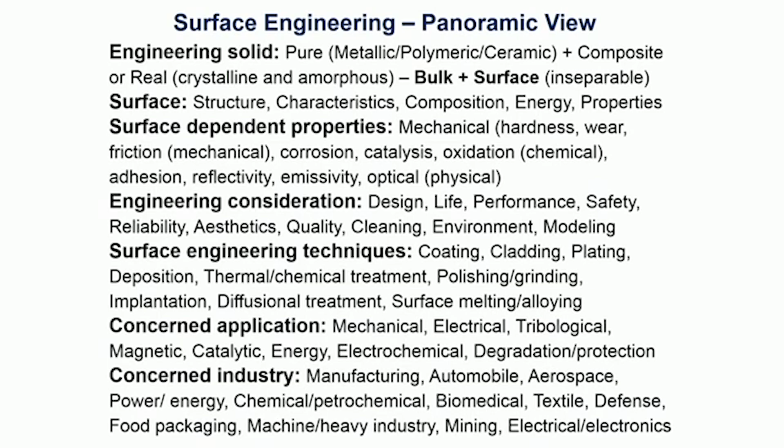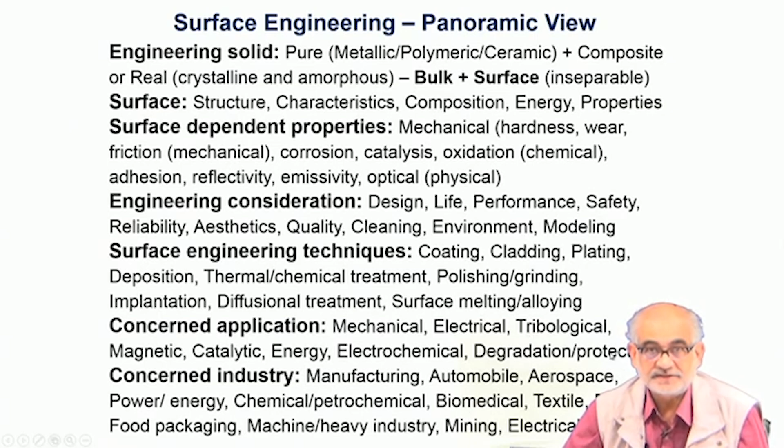It can be just from very intricate to mundane routine manufacturing processes, automobile industry, aerospace, power or energy production, chemical or petrochemical, biomedical, textile, mining industry, heavy machinery, food packaging, electrical and electronics, almost all kinds of applications. Wherever we are dealing with hardware, which is essentially a solid component, we certainly will have surfaces, and these surfaces are very important to make sure that the component actually performs to our desired expectation.

So talking about surface dependent properties, essentially we are talking about engineering properties. For example, when we talk of strength, when we actually perform a tensile deformation or a compression deformation or torsional deformation, we are talking about the strength of the bulk.

But when we try to scratch a solid and see that whatever device we are using for scratching is unable to make a scratch, then we conclude that the surface is very hard and we cannot make any scratch or indentation.

So we then derive a property called hardness, which essentially means the component is very much resistant to surface deformation. So I have taken the liberty of picking up three classes of properties, namely physical, mechanical and chemical, and listed certain properties which are essentially dependent only on surface chemistry and surface microstructure. For example, roughness, the asperities on the surface, color and reflection, emission or emissivity, wettability or adsorption characteristics, adhesion or cohesion - all these properties are essentially surface dependent properties and physical in nature.

When you actually apply mechanical deformation or mechanical activation, then you are concerned with certain responses. These responses could be hardness or friction or wear or fatigue and fracture, and so on and so forth. I must also qualify that fracture and fatigue are not entirely surface dependent properties, but the failure from these two classes essentially initiates at the surface.

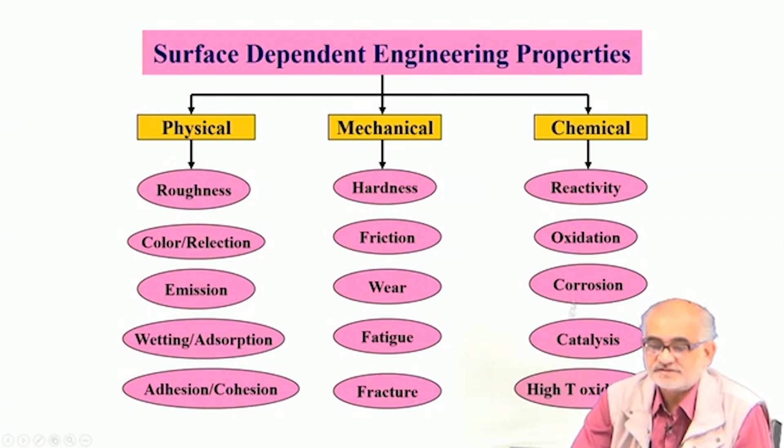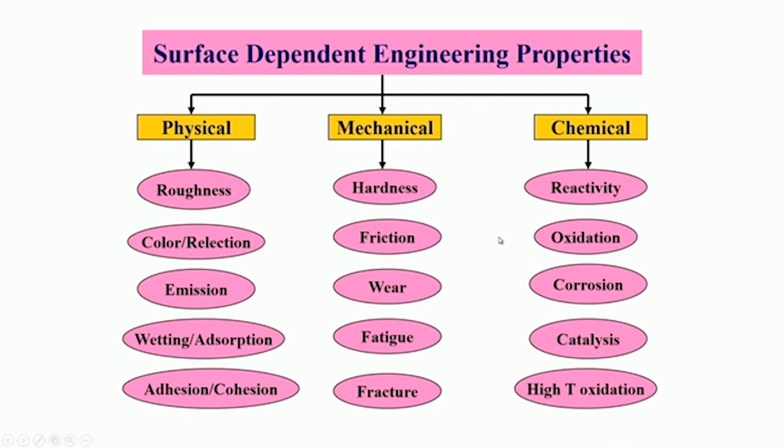So in order to improve upon the fatigue or fracture characteristics, one does take care of the surfaces. Similarly, chemical properties, namely reactivity, oxidation, corrosion, catalysis, high temperature oxidation - all these properties are essentially surface dependent properties. So for the time being, let's focus on the mechanical properties.

So essentially the definition or the scope here is that we are applying mechanical forces onto a solid component, and under that mechanical activation or stimulation, how does the component respond? That's the mechanical response or mechanical properties.

Obviously, the first and foremost would be the discussion on hardness. Whenever we talk of the mechanical strength of a material, even though it is a surface dependent property, we would first like to refer to hardness. So it's nothing but resistance to indentation or surface deformation.

So it basically expresses how resistant the solid is to such attempts to deform, and these deformations are usually through compressive forces. How does the material resist any attempt to deform under such compressive loading? The hardness, if it can actually be ascertained by whatever changes the activation makes onto the surface, by macroscopic observation.

We call it macroscopic hardness. So typically the so-called Brinell hardness tester would be one such device, or the rebound hardness by Poldi and so on. Essentially they test the intermolecular bond strength of the molecules or atoms at the surfaces. But then we must realize that no matter what kind of load we apply, we can always have certain derived components which could be tensile in nature or shear in nature and so on.

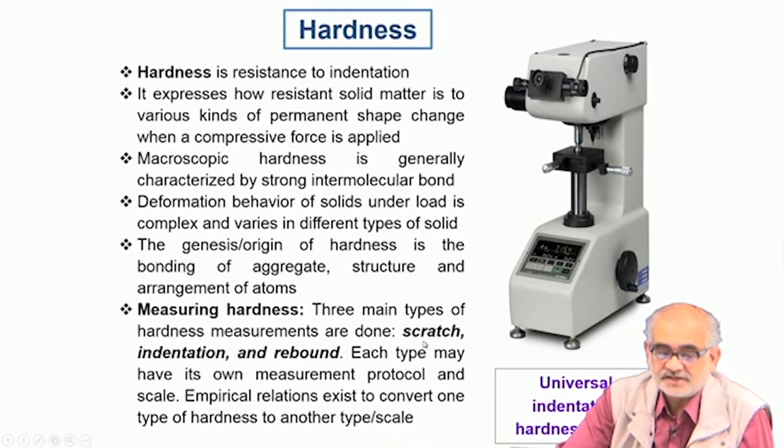Samples could be different. They may not be of very flat and uniform geometry - irregular, circular, completely brittle or powder type materials, like a stone or mineral. On the other hand, you can also have very nice diamond coated surfaces. So various solids present themselves in various forms, and we should have a recipe for measuring hardness for all such solid components under different conditions.

If there is no friction, we tend to believe friction works against the interest of humankind. But if there is no friction, we cannot walk, an automobile cannot stop, or an aircraft cannot land after flight. So friction is essentially a resistive force between two surfaces in relative motion - two solid surfaces, two fluid layers, or essentially any two entities which are sliding past each other.

When we use friction, for example when we rub wood or stone against each other, we convert mechanical energy to thermal energy, and that can actually even create a spark, if not a fire. So friction also allows conversion of energy from one form to another.

In terms of friction, there are four varieties commonly encountered. We can have dry friction, when we don't have any lubricant, and this kind of dry friction can lead to very substantial material loss or wear. We can have fluid friction, which can happen between two highly viscous fluid layers in relative motion. We can have lubricated friction, where we may have solid surfaces separated by a thin layer of lubricant, a very common experience with a ball bearing assembly or various other rotating parts. We can also talk about internal friction.

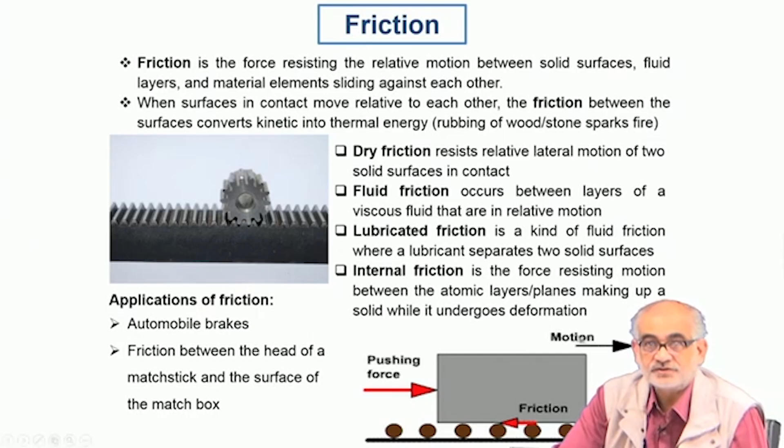Unless we apply sufficient load, convert it into stress, convert it into shear stress on a particular section or plane, enough for a dislocation to move - unless we cross that threshold, the so-called critical resolved shear stress - there will be no motion of dislocation, and we would say the internal friction is so high that we are unable to deform.

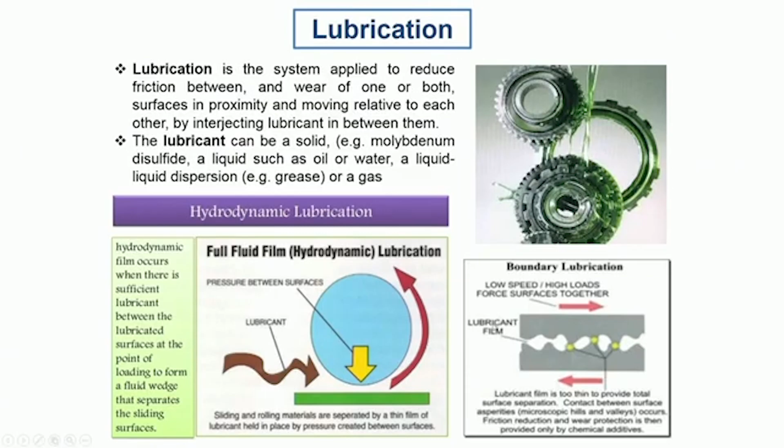So when two solids rub against each other, they are likely to cause certain reaction forces and eventually lead to attenuation of applied energy, and you would like to reduce that. How do you reduce it? You apply lubricants. Lubrication essentially is a system in which you try to reduce the friction and wear, or both.

This is done by applying certain extraneous agents which can be solid, for example molybdenum disulfide, can be liquid like oil or water or some other liquid, or it could be a liquid-liquid dispersion - say, two immiscible liquids together, which when under force allow easy sliding between them. You can even use certain gas or vapor for the purpose of lubrication.

The whole purpose of lubrication is to reduce the friction and also to make the deformation process or mechanical motion easier.

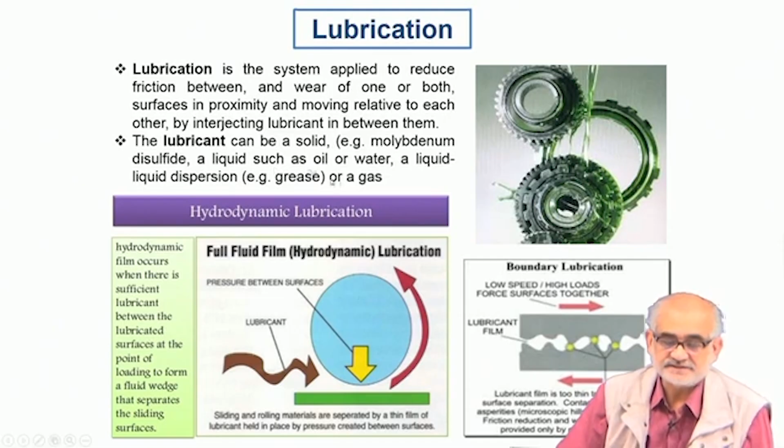Another very commonplace mode of deformation and degradation under mechanical activation is wear or abrasion. Here again we are talking about relative motion between two surfaces, and when we have such relative motion, we expect a certain amount of resistance to sliding, primarily because all solid surfaces which are synthetically produced or manufactured by artificial means will carry certain asperities or roughnesses.

When we have two surfaces with similar or different degrees of surface roughness, the tips of these asperities are bound to interact with each other and resist the relative motion. In most cases, when surfaces are dissimilar in mechanical properties or hardness, we can identify which one is harder, and the harder surface will cause more damage to the softer one.

Even if two surfaces have similar mechanical properties and surface contour, because of the application of forces, a derived component could be compressive in nature. Under such derived compressive loading, there could be momentary welding of the tips of asperities, and subsequent fracture of such cold welded bonds. In the process, a portion of material is dislodged - that is the particle, or volume of material lost, called wear debris.

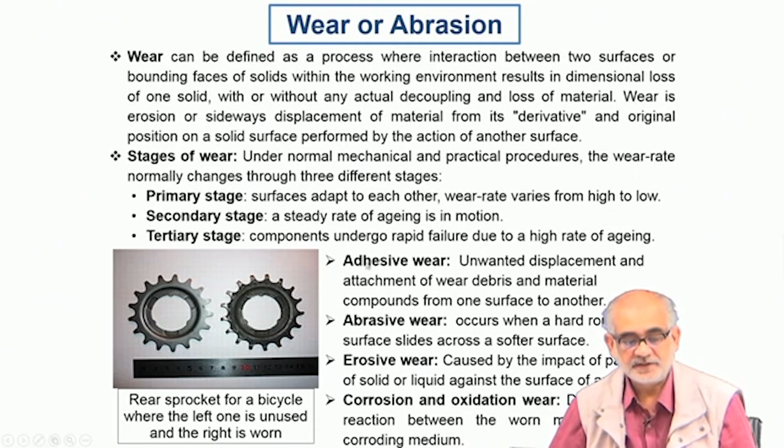This kind of wearing or abrasion can happen because of adhesive wear, abrasive wear, erosive or corrosive and oxidative wear.

In case of adhesive wear, as I was saying, we anticipate some amount of temporary bonding between the surfaces, or forces of adhesion, followed by dislodging of those bonds, and in the process we lose some material from either of the surfaces.

In abrasive wear, we encounter a situation where we have a harder surface or harder particles sliding against a softer surface, leading to certain loss of material.

In case of erosive wear or erosion, we expect a stream of particles, either solid or liquid, flowing onto the surface. For example, it can be a slurry hitting a rotating drum or a feeder chute, causing a very high amount of damage because of two reasons: the irregular shape of particles being harder than the surface, and more importantly the velocity and momentum with which they are hitting the surface. This can lead to fairly localized damage and can be extremely harmful.

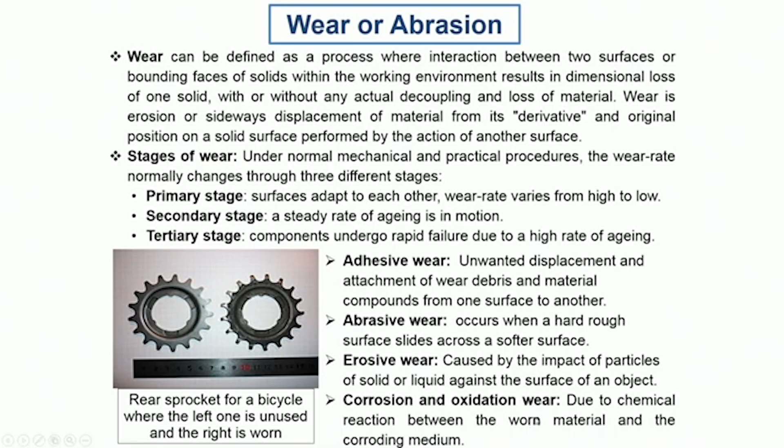We may also encounter situations where the presence of a corrosive environment, oxidation, or high temperature together can accelerate the damage already occurring due to wear. So wear occurring in a corrosive or oxidative environment can be more accelerated and can cause greater damage.

Another kind of damage we often encounter under mechanical activation is fatigue. Here the application of load is of a slightly different type, and this loading is essentially repetitive or cyclic in nature. The amplitude of the loading can be equal on the positive and negative cycle, or can be non-equal.

What is important is that the load is applied in a cyclic manner. Whenever we see such cyclic loading, the material, the solid component, is experiencing loading and unloading cycles. In this kind of situation, almost all engineering materials are known to fail at a level lower than the yield strength.

So obviously, when a designer designs a component based only on yield strength or tensile or compressive strength, that may not be adequate, because if the component is likely to undergo repeated cycles of loading and unloading, the material may eventually fail at a level of stress lower than the design limit.

So one has to take care of not only the tensile or compressive component of loading, but also check whether we expect fatigue or cyclic loading conditions.

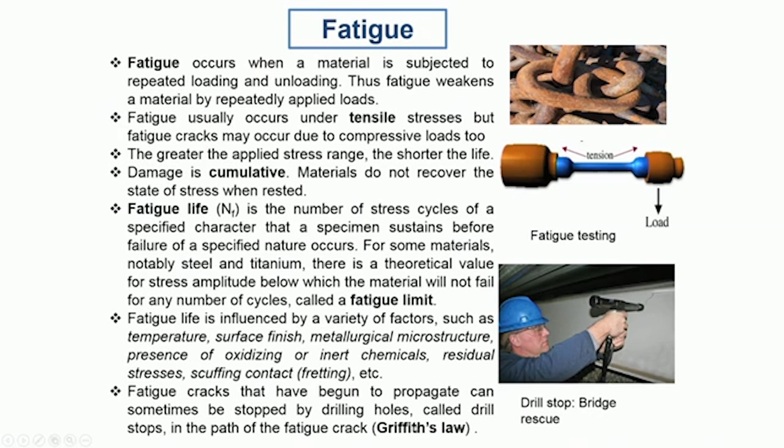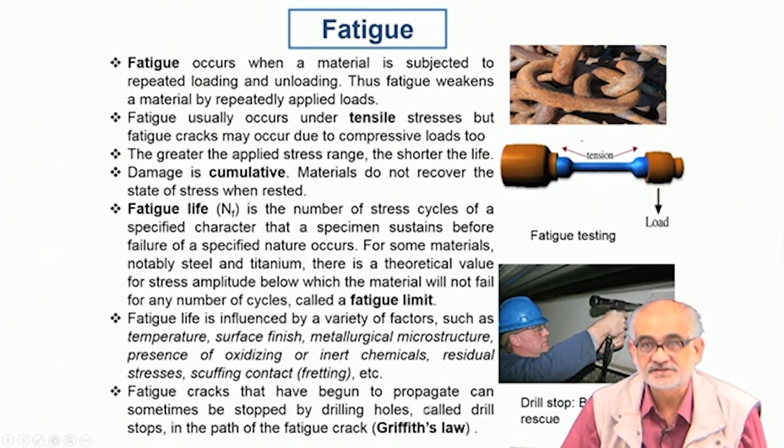So if you make a circular hole, since the radius is extremely large compared to a sharp radius of a sharp crack tip, in such a situation you would definitely expect the crack to get arrested because of the intervention of the circular hole ahead of such a crack tip.

Finally, material can fail. When it fails, particularly for brittle materials, we invoke the concept of fracture. Fracture is not necessarily a surface dependent property, but we must realize that essentially the material fails only when the crack opens up to the surface.

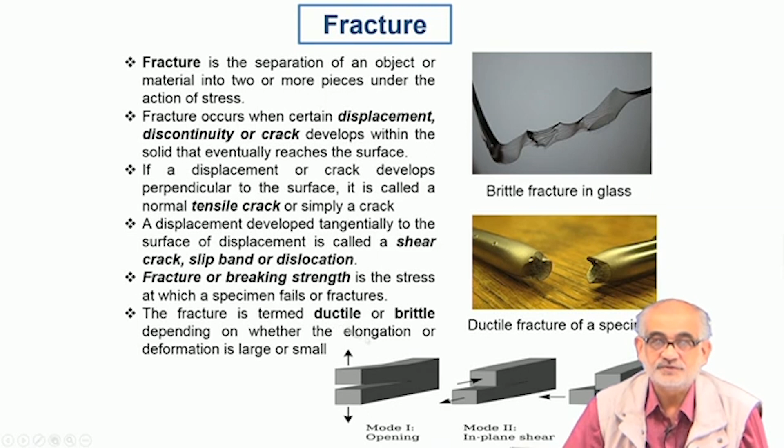So that's where you again have a major role of the surface, and you would like to create or modify the surface microstructure, composition, or the state of stress in such a way that any crack, even if it forms and opens and reaches the surface, is not able to propagate very easily.

But when we talk of fracture, we have to realize that there could be various types of modes of fracture. For example, if the crack growth is perpendicular to the direction of application of load, then we call it mode 1 fracture. Similarly, there could be mode 2 where the crack opening direction is parallel to the load application direction, but it can be in plane or out of plane mode, and accordingly the various types of fracture can happen in solids.

But essentially the broad classification would be that engineering solids could either be ductile, where the crack is unlikely to form very easily and propagate very drastically. On the other hand, there could be a brittle fracture which can lead to formation or propagation of the crack very easily.

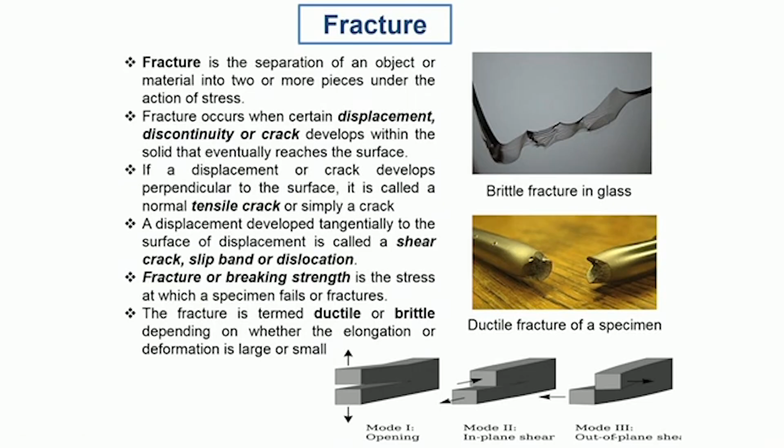So it's time to now take a look at or summarize what exactly we have discussed so far. We made an attempt to understand what are surface dependent properties and where do they come from, and we tried to classify them into primarily 3 major baskets: physical, chemical, and mechanical.

I tried to give you several examples as to why surface dependent properties are very important for various aspects of design, life assessment, synthesis or fabrication of components, and so on.

And surface dependent properties could be of various types, but when you talk of hardness or friction or wear and so on, I explained that these are essentially mechanical properties, surface dependent mechanical properties, because all these properties are essentially a response to stimulation which is mechanical in nature.

They certainly affect the overall life and utility of solid components, through the mechanical stresses applied onto the surface. So we need to understand where do they arise from, and how are they affected, and how can we actually improve upon by either changing the microstructure or composition or state of stress onto the surface.

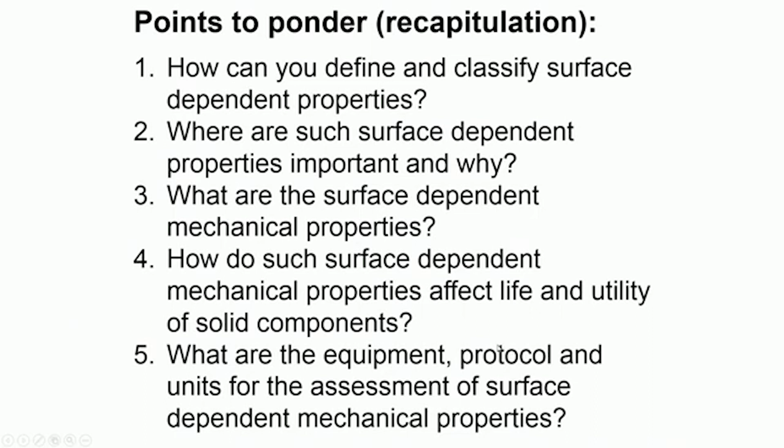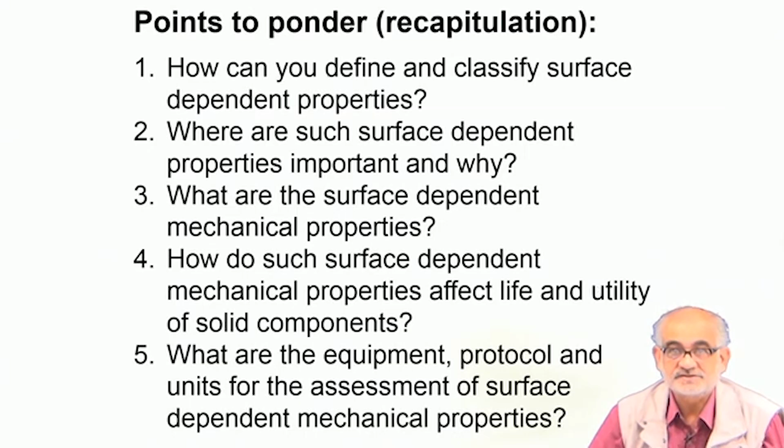And finally, we also need to understand that when we want to measure the hardness, what are the equipments available to us, what are the units of hardness, or for defining wear, what are the different types of wear, what machines do we use, and how do we express the kinetics of wear, or for example friction, and so on and so forth, so that these are assessed as a typical engineering property which can be used and utilized for various design and applications.